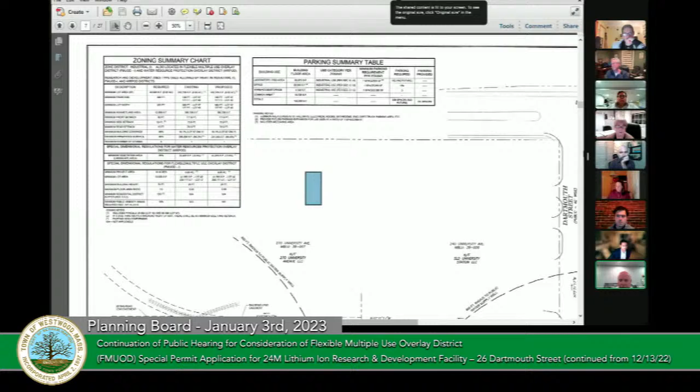Good evening. Just for the record, my name is Brian Dungeon. I am the site civil engineer working on behalf of the property owner, the Beyon Management Group. As Brian Dugdale has alluded to, we have revised the set of site civil drawings.

Not only the drawings, the stormwater management report, as well as the EIDR narrative, in response to comment letters that were received in October from both the Beta Engineering Group and Weston and Sampson, who provided a comment letter on behalf of the Dedham Westwood Water District.

At the end of November, right after the Thanksgiving break, we completed our review of the revised plans. We had it with collaboration with Nora. We've had a coordination call with both the folks at Weston and Sampson, as well as with Beta, to go through a dry run and review with that group the revisions. We outlined the revisions that were made to the plan.

So what I would like to do is take this opportunity to go through the changes that have been performed to date since our initial filing, or initial public hearing, back in October 24th. The comments that I'm going to be outlining or discussing right now are in response to the initial Beta letter of October 4th and their supplemental letter dated December 12th.

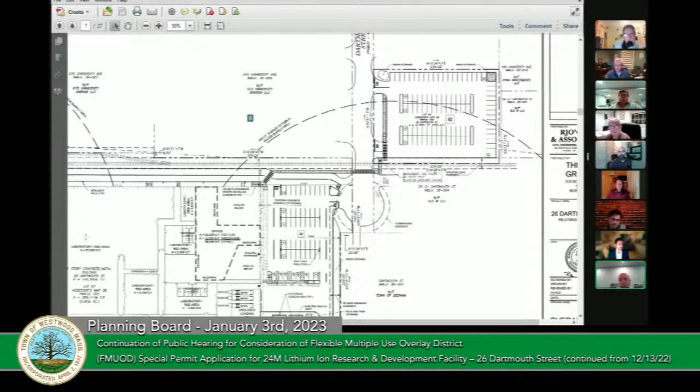We have also shown the location of the water line that services the site, and provided call out notes on the plans acknowledging what utilities are staying and what are being removed. As a result of resurfacing the parking lot area, we have identified the rims on the drainage and sewer structures that would need to be adjusted to the new grades if need be, and we've provided the details for that.

Beta's review also included a review of the stormwater management bylaw, and there are a number of comments that have come in. They've asked for, in the stormwater management report itself, a narrative which describes the project impacts and mitigation. We have provided that in section 8.4 of the stormwater management report.

The requirements of the stormwater management bylaw require profiles for the drainage trunk lines. We are requesting approval not to have to prepare the profiles. The reason is the existing stormwater management infrastructure is remaining as is, with no changes or alterations being planned for it—it already exists. So we didn't see the benefit of generating the profiles, and we're hoping the board would concur with our findings.

Beta acknowledged that some of the storm drainage structures on site have a catch basin to catch basin connection, and they deferred to the town with respect to any alterations to that. It should be known, and it'll come up later in my presentation, that on each run of the stormwater storm drain system, prior to its discharge from the site, we are proposing a stormwater BMP that achieves an 80% TSS removal rate of total suspended solids accumulated within stormwater runoff, along with a phosphorus removal rate of greater than 51%. So although there are catch basin to catch basin connections, the upgrades planned for the stormwater management system will still meet the objectives of the stormwater management bylaw with respect to removing pollutants and phosphorus from the runoff.

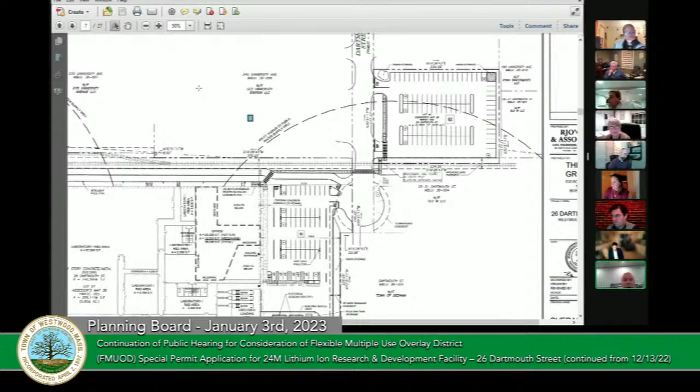We have provided in our updated report the necessary TSS removal calculations and supporting documentation regarding the stormwater BMPs that we are planning to use to treat stormwater runoff. I will just see if I can scroll down to it.

Whoop, what happened to it? Oh, something happened, it all went white. I'm not sure what happened. But let me see if it'll regenerate itself, and I'll just kind of quickly go through the rest of this.

As I mentioned, there was acknowledgement of the phosphorus requirement. What we are using is a biofilter type BMP, a structural filtration system that, as stormwater enters it, filters the rainfall runoff so that it captures 80% of the total suspended solids accumulating within the first inch of runoff, as well as achieves a 51% or greater phosphorus removal rate.

There are 5 of these BMP structures proposed, on each leg of the storm drain system that traverses through the main lot and then discharges out at the lower left-hand corner. I apologize, I'm not sure why I just lost all my plans.

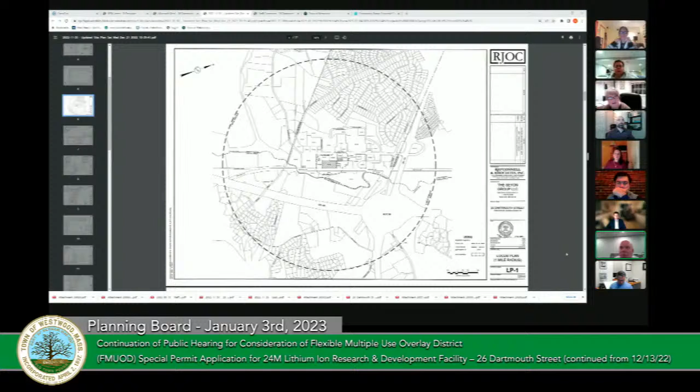If I can, for some reason the plans are all locked up. Brian, I took off your screen. If you want to try and share yours again, you can. Otherwise, if you tell me what sheet to go to, I'll navigate. I think it's C2B, Nora, would be the sheet with the storm drainage.

Is that it? Yeah, if you could just blow that up, I'll show you where the stormwater structural BMPs are. You'll see the rectangles on this plan. In this case, you'll see two of them, one there and one right above it.

Those are inline stormwater BMPs that will be addressing how we remove total suspended solids and phosphorus from stormwater runoff that is generated on site, within the 400-foot wellhead protection area.

There are a total of 5 of those. There are 4 of them on the main lot, and there is 1 on the remote parking lot area.

It should also be noted that following up from our October 25th hearing, I received an email from Nora on November 3rd, which requested some additional documentation and information to be prepared and submitted as part of our application. That information included the following.

It wanted an updated hazardous communication plan, which we have submitted with this application. A chemical hygiene plan has been submitted with this application. An emergency access action plan has been submitted with this application.

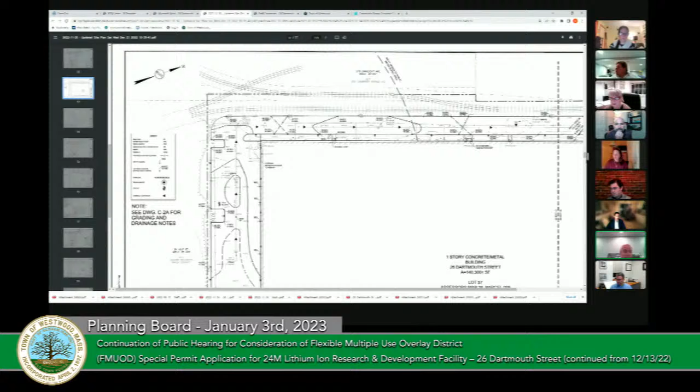The location of the dumpsters and enclosures is identified in the lower left-hand corner at the back of the site. There was another comment about plans for snow removal, which we've identified in the O&M plan. The quantity and location of chemical fume hoods has been identified in the chemical hygiene plan that was submitted.

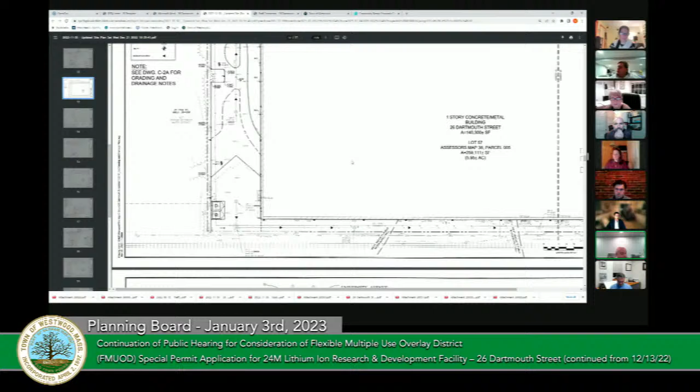Soil testing results were requested for any planned excavation. In our EIDR narrative, we identified that we intend to utilize on-site materials to the extent possible, though a small quantity may need to be disposed of off-site. We've prepared and submitted a letter from Sanborn Head and Associates, the landlord's environmental consultant, stating that prior to any materials leaving the site, they will be tested by Sanborn Head. At that point the appropriate disposal facility will be identified, located, and acknowledged, with all disposal records kept and logged by Sanborn Head.

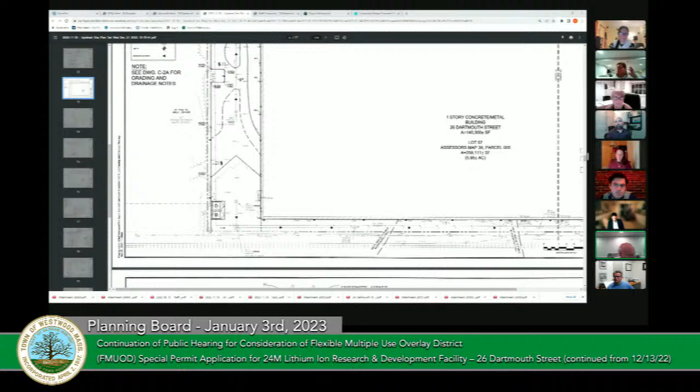This also holds true for PCB testing of building materials and transformers. In our supplemental information, we included a narrative prepared by Sanborn Head, who acknowledged that some window caulking on the existing windows had traces of PCB materials. They've prepared a protocol for how that would be properly managed and disposed of, and they're overseeing that activity. This also holds true for the existing electric located inside the building—if any removal or upgrade is required, it'll be reviewed by Sanborn Head, and appropriate measures will be taken to develop a work plan for the proper handling and disposal of that equipment.

One of the other comments made from that November 3rd memo was identification and anticipated staffing plans, on-site EHS and emergency management support. This was submitted and included in a document titled Article 17, Westwood Hazardous Material Bylaw Narrative. So we've acknowledged that piece and included those requirements. In short, those are the changes made to the reports and the additional information provided at the request of the town.

As I mentioned before, right before the holidays, the landlord and tenant met with the Westwood Fire Department to review these documents. My understanding, and I'll let the landlord speak in greater detail since I wasn't present, is that all indications are the fire department is pleased and comfortable with the information submitted. It's acknowledged that should this project obtain all its permits, additional on-site inspections will be required as renovations are performed, and we are in full cooperation with the fire department to coordinate with them regularly to ensure they are comfortable.

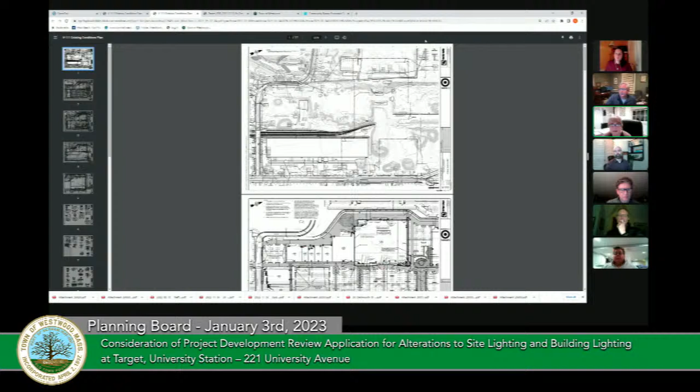All right, so I have the site plan first to show where this is. Let me try to make that a little larger. Yeah, so I think, Nora, if you want to stay on that plan. Okay, all right, so I'd also just like to mention I'm here with Glenn Heinmiller from Lam Partners. Lam Partners is a lighting consultant in Cambridge, and Glenn has been helping us review this. So should the board want to hear from Glenn at some point, please feel free to let us know that.

So I'm sure most people are familiar with the Target development, with the overall University Station development. It's really anchored in the center by Target, just on the south side of the central driveway, and then Wegmans on the north side of the central driveway. Target is a little unusual in that it owns a portion of land to the rear, directly to the rear of the building, and to the front of the building. And is everyone seeing my cursor here?

No. Okay, we can't see your cursor because I have the lines displayed. All right, so Nora, I don't know if you're able to just point out the Target line, but there's a lot line which emanates from the front. Yes. Continues down towards University. Yes. Excellent.

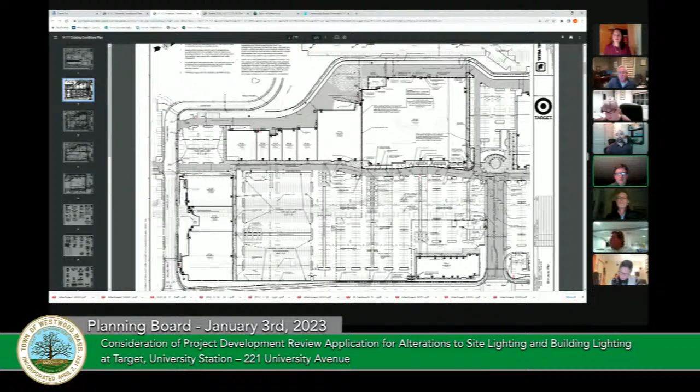So Target owns that portion of the site, and what they're proposing within that portion of the site is certain changes to the lighting system. There are a series of lights on existing poles within the various parking trays that exist there. And essentially what they want to do is modify that lighting system to provide an enhanced

motion sensing capability with a view to netting energy savings. So on each of the existing light poles within that area of land that's essentially owned by Target, maintaining the existing poles and existing pole locations, obviously they want to change out the fixtures on top of those poles for a newer, slightly more modern LED fixture, which has these motion sensing capabilities.

In addition to that, they want to add 3 additional lights to poles along the driveway. Nora, I don't know if you're familiar with those, but essentially in the front of the building on what is the east side of the access drive, there are 3 poles.

Just come up to the building, Nora. Come up to that. Yes, this access drive here. Continue down, Nora. Sorry. All right, yes, and go to your left. There you go. That access drive there, they're adding an additional fixture on the top of each of those poles. So there's 2 there if you go out today, and there'll be a 3rd just basically shining down onto the access drive, just to add a little bit more light there.

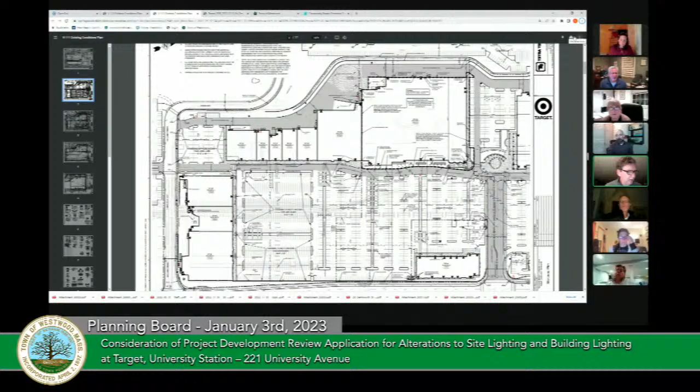So this was town staff and your recommendation to Target, and have they responded to that? Yeah, essentially their response was what they put into the letter, which was, we'd like to continue to operate it the same way. There wasn't a lot of very specific detail, and that's, I think, one of the things that going forward just needs to be clarified. The specifics about in terms of schedule, what defines schedule, opening and closing.

So I think we have two issues. We have what they're doing now with no approval, and the board should, if the board is willing to grant an approval for some change, they can apply that approval to what's happening now as well as what's happening in the future. If my understanding is correct, the current fixtures are turning off, but they don't have motion sensors on them, is that correct? Yes, it's actually a worse condition now with the existing fixtures that are in place, that they're turning off and they're just staying off. So if you were to be shopping at Wegmans and you want to go over to Chipotle, you're going to be driving through a dark lot right now.

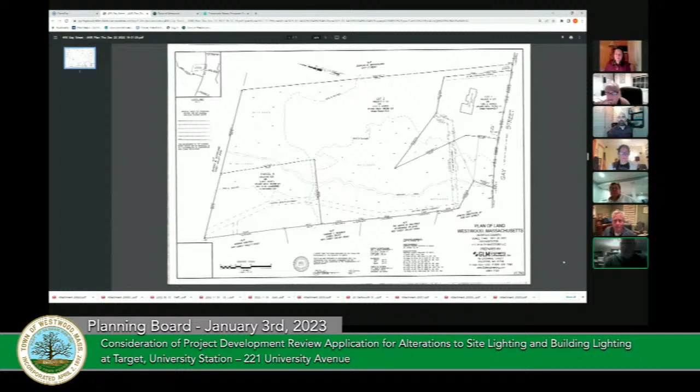Sure, sure. This is the property at 490 Gay Street that we recently purchased in March. The property consists of approximately 14 acres. We've subdivided the property into 2 building lots and 1 lot that's not to be considered a building lot.

As you can see, lot 1 is where the existing house is presently, and lot 2 is the larger portion of the rear part of the land that has its frontage on Gay Street, and a separate parcel out to the back, which we're not sure whether or not it may be sold off to an abutter or not. So we're keeping that as a separate parcel at this point.

And we've had discussions with the building department, and they're okay with this plan, as far as I can remember.

So as Lou described, lot 1 and lot 2 both have sufficient frontage on Gay Street, and they both have actual access across that frontage. Parcel A is noted as not a buildable lot. So I believe the plan meets the criteria for an ANR plan and does not show a subdivision.

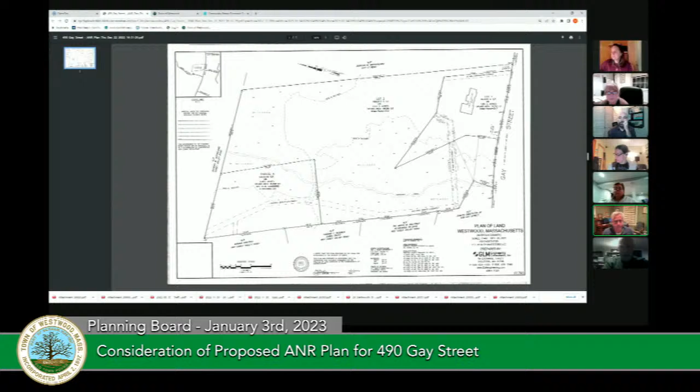Okay, so I can put up the proposed motion. This is a motion to endorse. Yes.

I'll jump in. I hereby move that the planning board find the approval not required application for 490 Gay Street, dated December 20, 2022, to be complete, and that the board vote to endorse the submitted plan as not requiring approval under the subdivision control laws.

Second. We have a motion and a second. Any further discussion? Seeing none, we'll take a roll call vote.

Josh? Aye. Ellen? Aye. Phil? Aye. And I'm an aye also.

Okay, great, thank you very much. All right, good luck. I'll need everyone to go to the police station to sign. Thank you very much. Bye-bye. How many copies would you like, Nora? Do we need to take up the other ANR plan before going back to zoning?

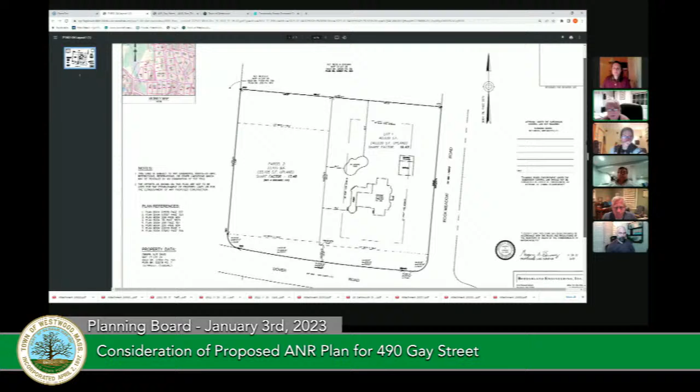Okay, so this plan was submitted by Stephen David. It involves what's currently one lot at the corner of Rock Meadow Road and Dover Road that has an existing home on it. The applicant would like to divide this into two lots. One lot would have frontage on Rock Meadow Road, and the other lot would have its frontage primarily on Dover Road with a small portion on Rock Meadow.

The second parcel is shown as not a buildable lot because it does not have sufficient frontage. This lot is in the Single Residence C zone and is required to have a minimum of 125 feet of frontage. Actually, looking at that, it does look like it has 125 feet, so I'm not really sure why he has it listed as not a buildable lot.

Is there frontage? It looks like it curves on the bottom left. Does it curve to the point where it's not 125? What is that, 130? The width shows this above it. I can see it now—the length shown is 125.36 feet from this point to this point.

And the other side is fine, right? The other lot has 228 feet of frontage on Rock Meadow and also has this additional frontage on Dover Road. That lot is fine, the setbacks are appropriate. I've had that lot reviewed by the building commissioner to determine that it would be a fully conforming lot after the ANR plan. So I actually don't recall offhand why Stephen lists this one as not a buildable lot.

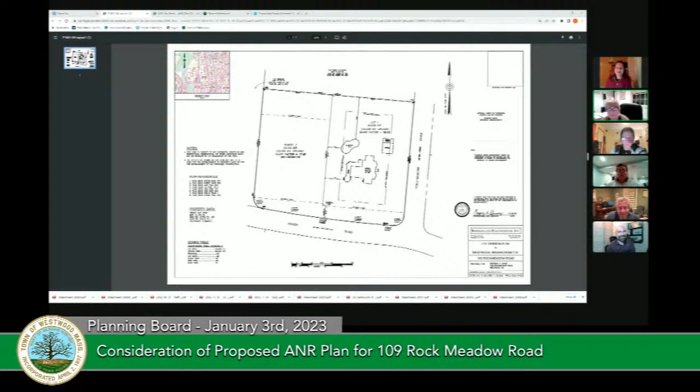There we go. Do you see it now? Yep.

Yeah, 109 Rock Meadow, number 4. I move that the planning board find the approval not required application for 109 Rock Meadow Road dated January 13th, 2021, and revised through November 29, 2022 to be complete, and that the board vote to endorse the submitted plan as not requiring approval under the subdivision control laws.

I second. We have a motion and a second. Any further discussion? Seeing none, we'll take a roll call vote. Phil? Aye. Josh? Aye. Ellen? Aye. I vote aye.

Okay, thank you very much. Now going back to the third agenda item, we have a discussion of potential zoning bylaw and general bylaw amendments.

So I sent out board members a revised version of the 5 articles. I can call that up as well. Can you see that? Yeah. Make it a little bit bigger. Oops, sorry, I lost it. Just one second, try again. That's more familiar.